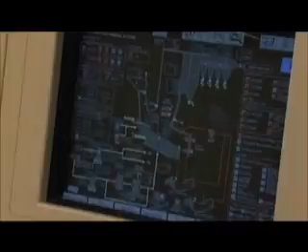Besides the huge space they occupy, landfills are also prone to causing air and groundwater pollution. Waste incineration can not only save land, but also aid reduction, resource recovery, and harmlessness-oriented waste treatment, while at the same time creating substantial job opportunities. What's more, it can help create a beautiful environment, change waste into wealth, save energy, and reduce emissions.

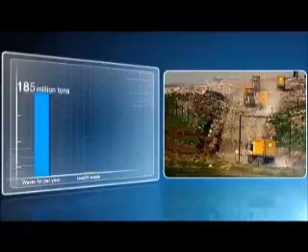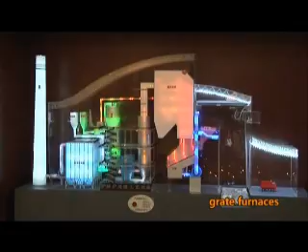Waste treatment practices in developed countries are mainly incineration-oriented. By introducing leading-edge technologies and carrying out in-depth studies, SWT now offers 3 global leading waste treatment technologies: grate furnaces, fluid bed, and thermal decomposition furnaces, and is committed to building the most advanced world-class incineration facilities.

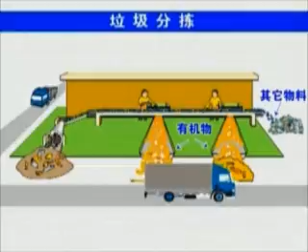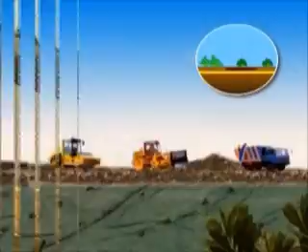At present, the world's waste disposal methods are mainly classified into 3 types: sanitary landfill, incineration, and composting. Sanitary landfill is to place waste in layers and cover it with compacted soil. However, it occupies a large proportion of land, and it has proved to cause surrounding water, soil, and air pollution.

Composting is to decompose waste organic matter or fiber bundled with other materials and separate it into humus material. This way has secondary pollution. Harmful substances and heavy metals are difficult to control in fertilizer production.

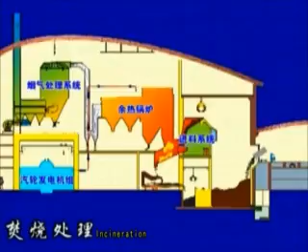Incineration is to dispose of waste at high temperature. After waste incineration, more than 80% of the weight and more than 90% of the volume can be reduced. Heat power from waste incineration can be utilized for heat supply and electricity generation.

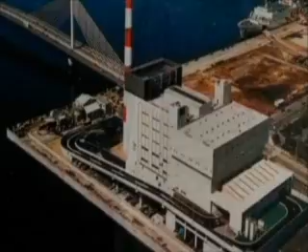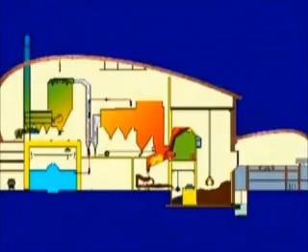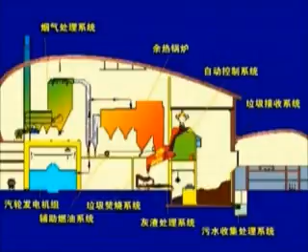Incineration has become the chief method of waste disposal in developed countries. Take the waste-to-power plant with daily capacity of 1,000 tons, for example. The waste-to-power plant mainly consists of waste collection system, waste incineration system, waste heat boiler and its auxiliary equipment, turbine generator unit and its auxiliary equipment, gas treatment system, ash treatment system, sewage collection and treatment system, auxiliary fuel system, and automatic control system.

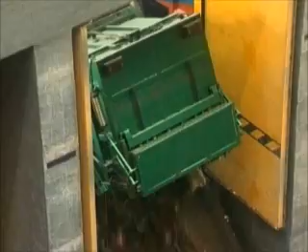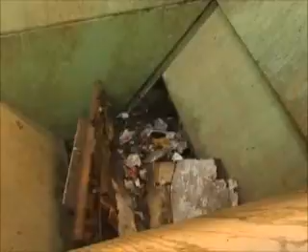The waste from sealed garbage trucks are transported to the factory, discharged into the main building lobby, and dumped into the waste storage pit. The power plant is also equipped with large-sized waste crushers to break up large pieces of waste before feeding into the inlet throat. Storage pits have a holding capacity of more than 10,000 cubic meters of waste, available for 5 to 7 days.

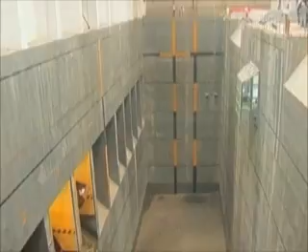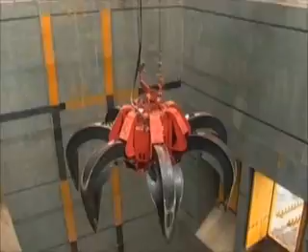The storage pit is equipped with 2 8-cubic-meter waste grabs. The grab transports the waste into the entrance funnel and from the chute into the grate incinerator. The temperature in the high temperature combustion zone reaches 1200 degrees Celsius.

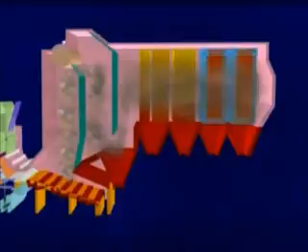The flue gases from waste incineration go into the waste heat boiler. The boilers are equipped with an SNCR system to effectively reduce nitrogen oxide pollution. By setting a steam and water system within the waste heat boilers, the heat power from high temperature flue gas is transferred into the superheated system and into the steam turbine generator unit to generate electricity.

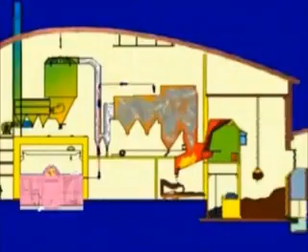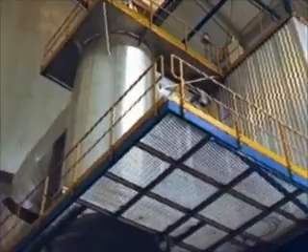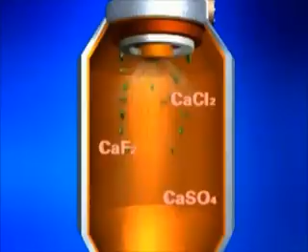Out from the waste heat boiler, flue gases go through the reaction of a semi-dry spray absorber and are sprayed with lime slurry to remove acid gas components, and injected with activated carbon powder to absorb heavy metals, dioxins, and other substances, and then pass through a bag filter for dust absorption in the flue gas, through an induced draft fan, and drained out of a 90-meter high chimney.

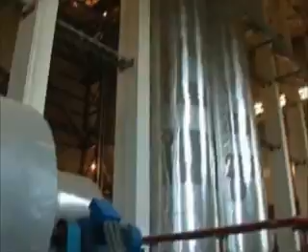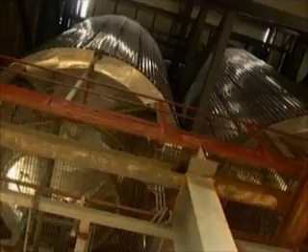Fly ashes from boilers and the flue gas treatment system are collected in the funnel and then sent to the reaction product storage warehouse. Fly ash contains a certain amount of heavy metals and can be solidified and stabilized by adding cement and a coupler. It is then packaged and transported with special sealed trucks for landfill disposal.

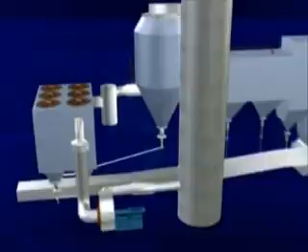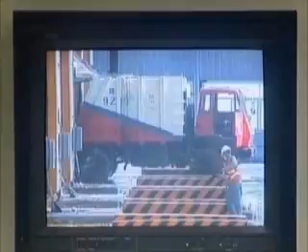After the flue gas treatment system, the emission of pollutants meets European standards. The incineration process adopts the world's most advanced auto control system. The computer-based Distributed Control System (DCS) and PLC are adopted simultaneously to help all steps achieve fully automatic and optimum control, realizing safe, reliable, and cost-effective operation.

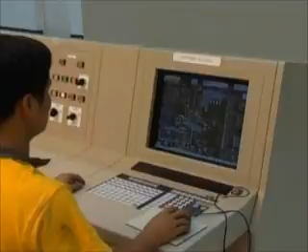Waste incineration not only saves lots of land area and realizes waste reduction, resourcefulness, and harmlessness, but also creates plenty of employment opportunities, beautifies the environment, turns waste into treasure, and promotes the development of the recycling economy to realize energy saving and pollution reduction.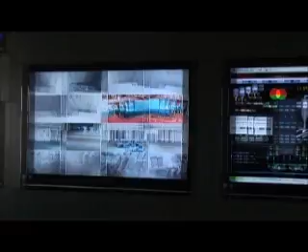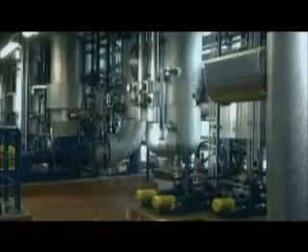With world-class waste treatment technologies, SWT believes that every step forward nourishes every inch of land. SWT complies strictly with European Union and Japan incinerator guidelines in terms of design, operations, testing, and maintenance of these systems. Through scientific treatment, waste is recycled to produce steam, clean hot water, power generation, and high organic ground tiles.

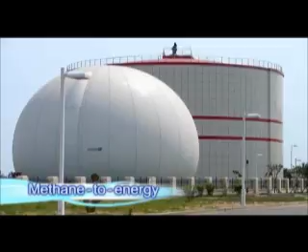We not only desire mountains of gold and silver, but also pursue clean water and green trees. We humans shoulder a heavy responsibility with regard to environmental protection, energy conservation, and emission reduction. We shall respect the interests of future generations and the health of our contemporaries by making our cities cleaner and our world more beautiful. A clean future with SWT's advanced technology that changes waste into a valuable commodity.